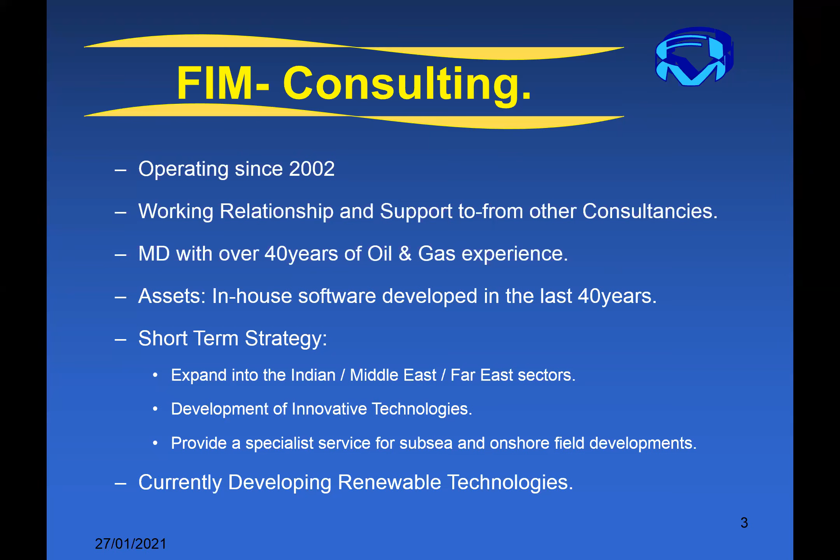With our expertise and software resources, we can very quickly identify fields for evaluation and acquisition for large organizations, as well as banking or financial institutions.

We undertake screening studies to provide optimum strategies for the field we want to develop or operate, through integrating reservoir, well, pipeline, and host facilities, and evaluate alternative reservoir depletion options, well production enhancement, multi-phase and transient operation analysis, and a range of feasibility studies to assist in the development or exploitation of the field.

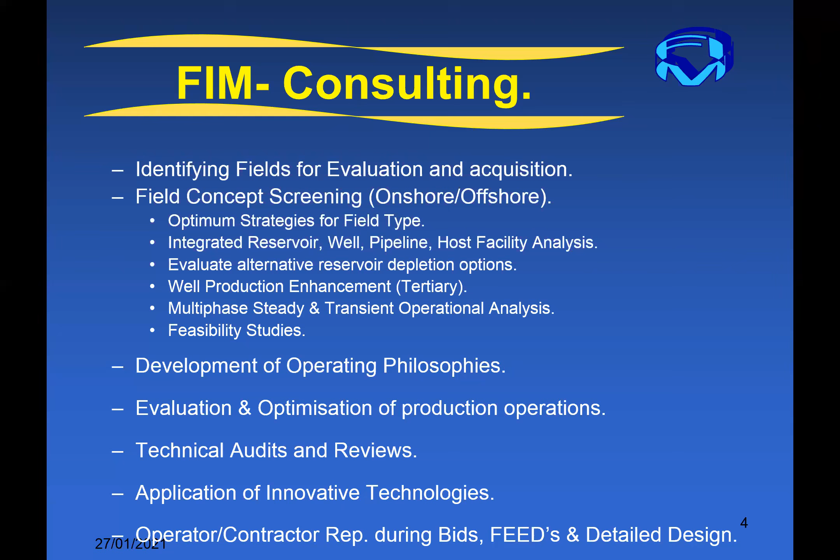As part of detailed design, we develop operating philosophies, evaluate and optimize production operations to make them as simple as possible, conduct technical audits and reviews, and apply innovative technologies where possible. Obviously, project managers don't like new technologies unless they've been tried and tested. We also represent operators and contractors during the whole range of studies, from initial bids, front-end engineering designs, to detailed design.

This is one of our software field options. We can model everything you see here, from the reservoir, the seabed, production wells, Christmas trees, connection systems, the jumpers between the tree and the manifold, flow lines, the insulation on the flow lines, and risers.

The reason for this is to answer a number of questions. For the field you want to develop or have developed, what's the best technology? Is it gas lift or natural flow? Do you need a downhole ESP pump or a multi-phase pump on the seabed, or do you need to separate on the seabed and transport the fluid separately? What are the flow assurance risks? What's the best reservoir recovery option to maximize oil from the reservoir and enhance production through the production well? And, the thing that makes the world go round, what's the lowest cost option?

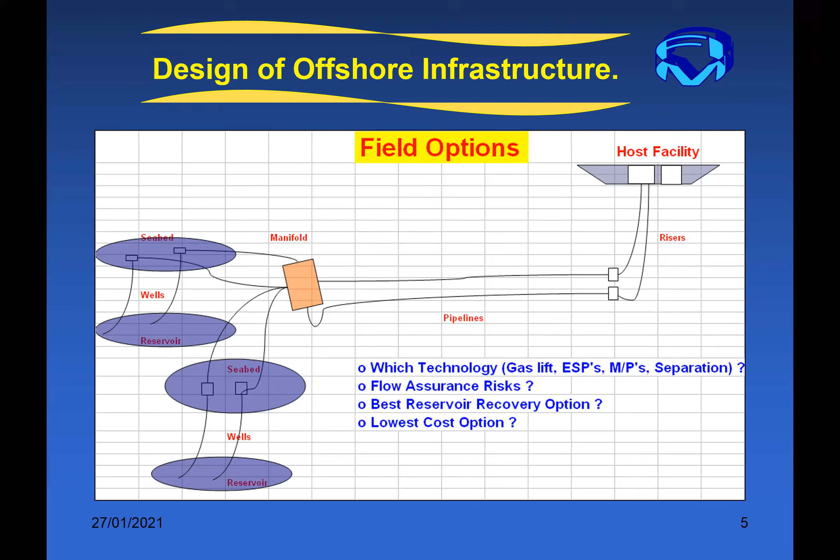These are things that can be answered by our Python software. In terms of flow assurance, we can split this into three areas: what causes blockages in the flow path, what about the integrity of each of the systems you're going to design and develop, and what are the operational issues?

From blockages: scales from water composition may precipitate various elements such as barium and strontium; for oil and gas, paraffins, wax, and asphaltenes based on the characteristics of the oil; gas hydrates, meaning if you mix light hydrocarbon gases with water you get hydrates like ice; emulsions, a mixture of oil and water; and sometimes foaming across high pressure drop chokes and valves in the system.

With respect to integrity, the main areas are corrosion, typically from CO2 in the light hydrocarbon content and water; production of sand, which erodes the metal, especially as sand passes at high velocity through bends or other equipment like valves; and flow-induced vibrations or resonance that may be caused due to production.

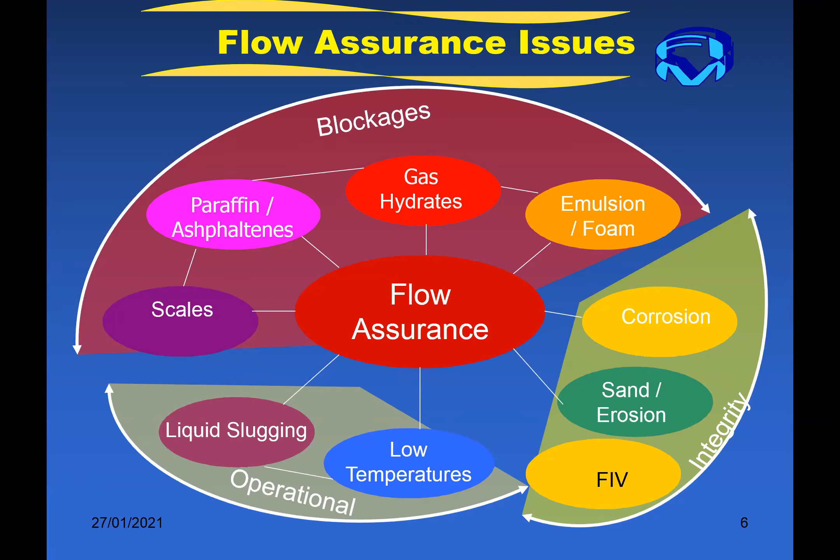In simplistic terms, these are the sort of parameters you need to understand in assessing flow assurance: what the reservoir pressure and temperature is, well depth, water depth, and the distance you want to transport to a host facility. It may well be onshore.

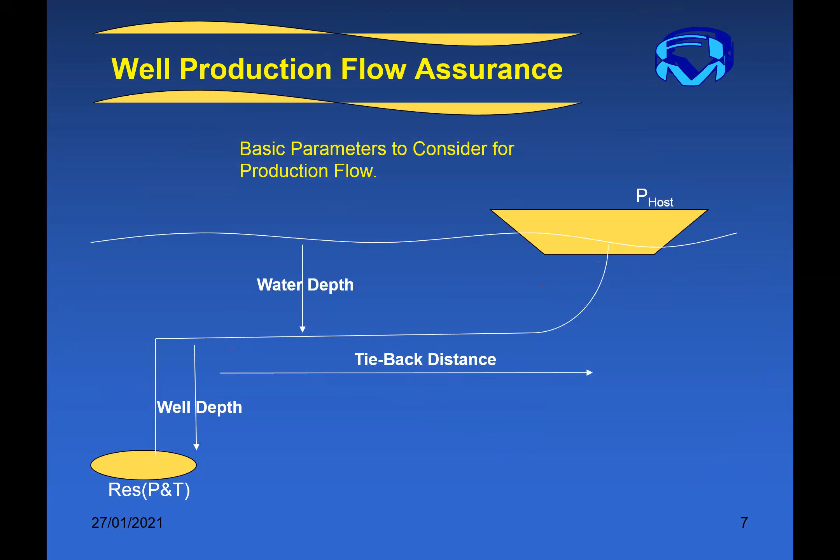So the question is, nobody in the world now likes the fact that we're producing hydrocarbons because they're so polluting. We've got to find a solution to the pollution aspect, especially CO2, in the oil and gas industry. But in the meantime, why do we need oil? Let me go through and explain why.

One of the highest consumers of energy is the US, and per capita it's about 11 kilowatts. If we take 5 kilowatts as the average for the world, and world population is 7 billion, we need something like 35 terawatts per day.

Now, if we were to replace this over a period of 25 years, look at what we would need in terms of different renewable energies. If it's nuclear, we need almost 4 nuclear plants built, 1 gigawatt per day. If it's wind, we would need 53 turbines of 3 megawatts each built every hour. If it's solar, we need to cover 255 square meters installed per second. If it's bio-based, we'd probably all starve because we don't have enough bioenergy.

However, we need to consider maybe all of these in addition to oil and gas during this transition phase. By the way, oil will be around for many, many years.

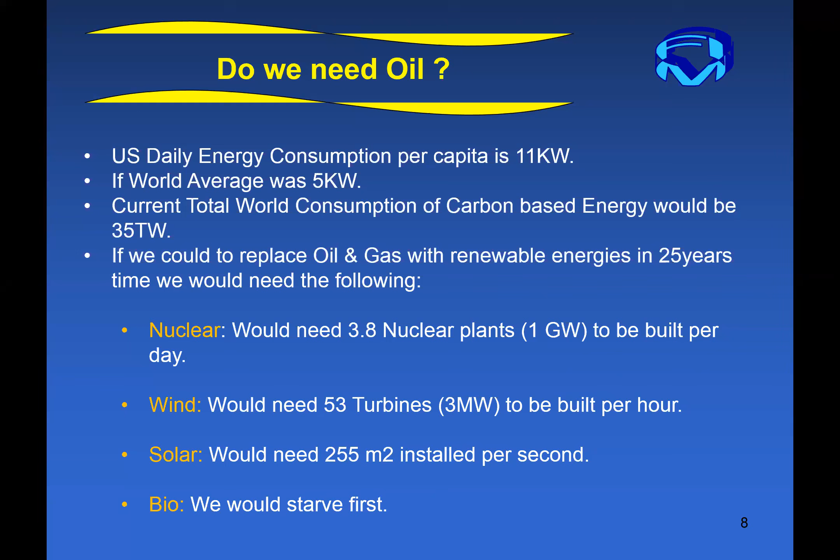So coming on to heavy oil, what is it? It's simple: it's high density and high viscosity.

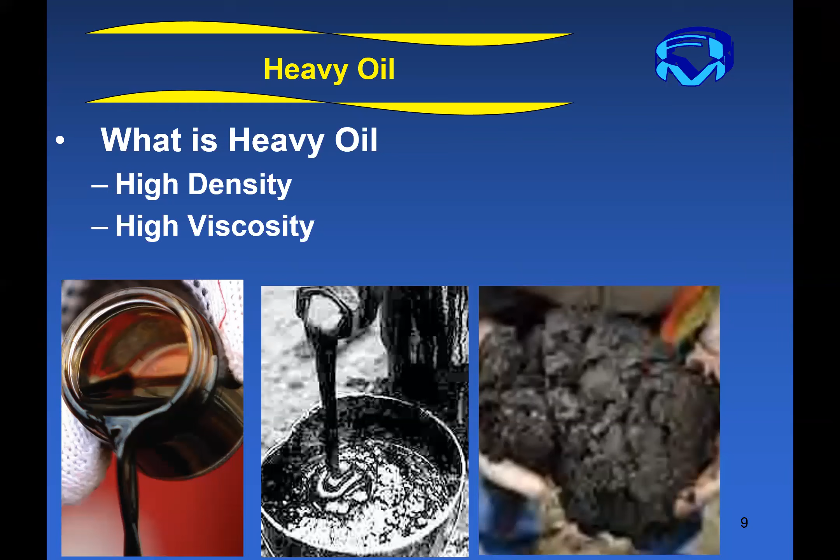Class B is extra heavy oil, where the API is much lower, 7 to 20, viscosity is high, 100 to 10,000, and also flows at reservoir conditions. Hopefully these are the ones we have offshore. Then Class C, the viscosity is much higher, and Class D, oil shale, is mining extraction.

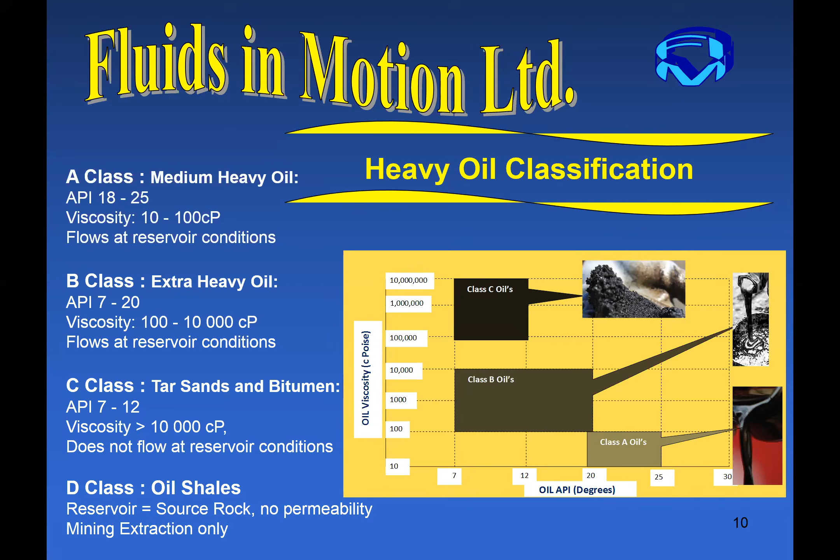And this is a classification provided by Total for some of the fields that have been developed over a number of years, and it's Class A and Class B offshore that have been considered for development or are producing at the moment.

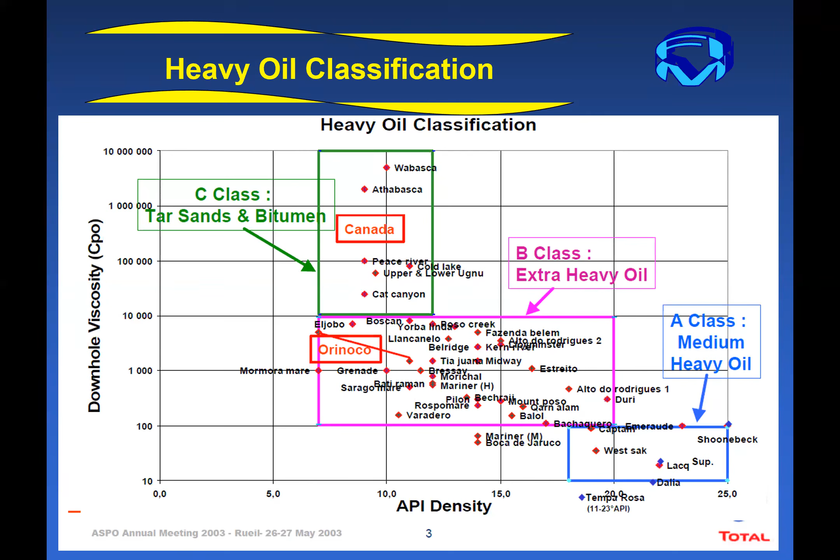Heavy oil reserves by region — this shows that the American continent, both north and south, has the lion's share of heavy oil, although it exists in other parts of the world.

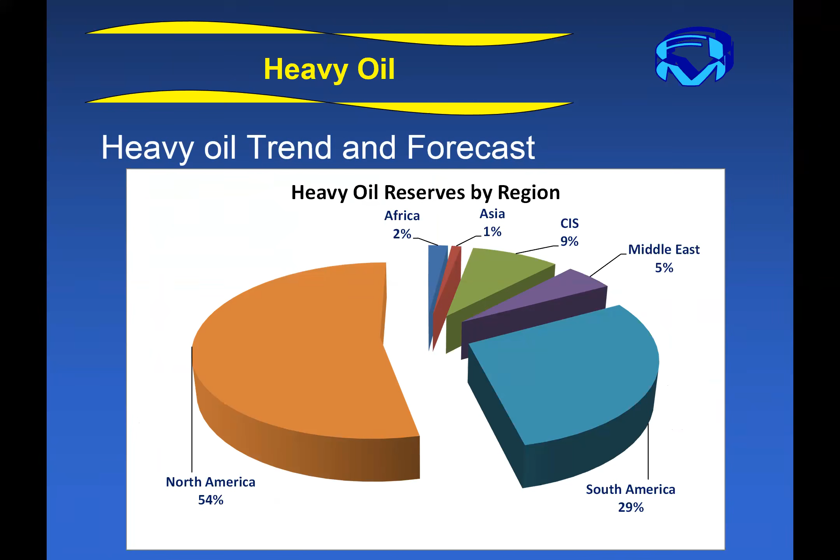And heavy oil reserves by type — you see, luckily for us, Class A and Class B are the lion's share, almost 50%. So that's good news.

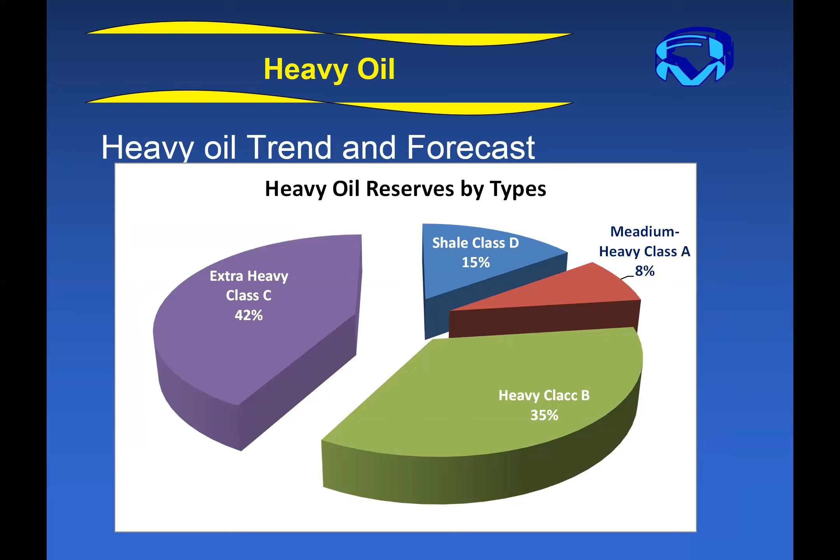World oil reserves by oil type. Now, we've been producing conventional oil, which is only about 30% of the total oil available. Extra heavy oil and heavy oil is almost 20 to 40% is heavy oil. So there's a lot of energy out there, but we have to make it environmentally viable.

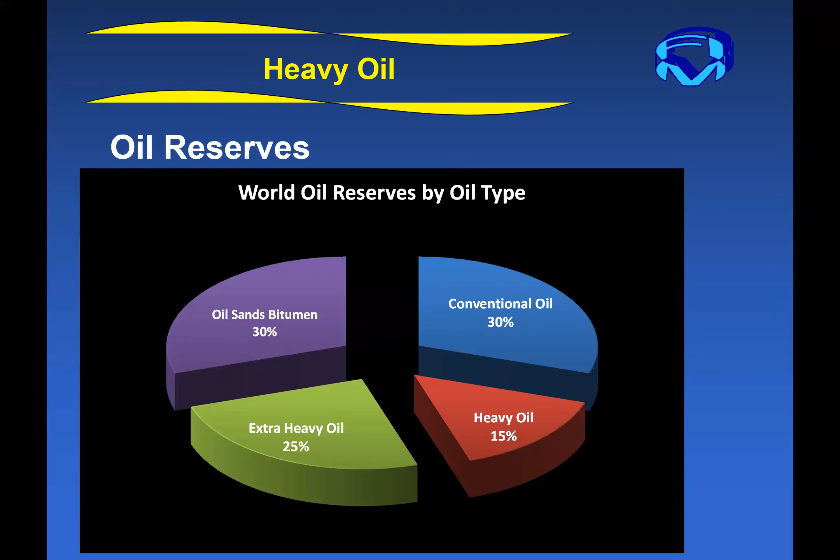So heavy crude oils — about 10% have been produced at the moment approximately, maybe a bit more or less now.

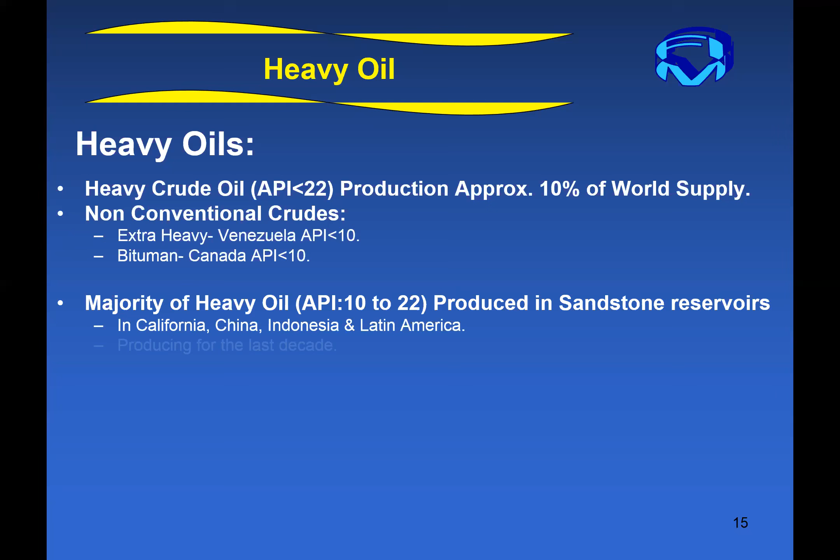Non-conventional crude, extra heavy oil — examples are from Venezuela, API less than 10, bitumen in Canada, less than 10 API. Majority of heavy oil between 10 to 22 API is produced in sandstone reservoirs in California, China, Indonesia, Latin America, and they've been producing for the last 10 to 15 years, or maybe some even longer.

Generally, cold production and steam enhanced recovery are some of the techniques used. Huge discoveries in carbonate reservoirs — the formation of carbonate reservoirs is fairly complex with respect to varying permeability and porosity in the same formation, so it makes the simulations more difficult.

There are many naturally fractured reservoirs, which is good news. Only a few carbonates have been produced at the moment. Pilot steam injection projects in Kuwait, Saudi, and Oman — maybe some of these are now beginning to be produced.

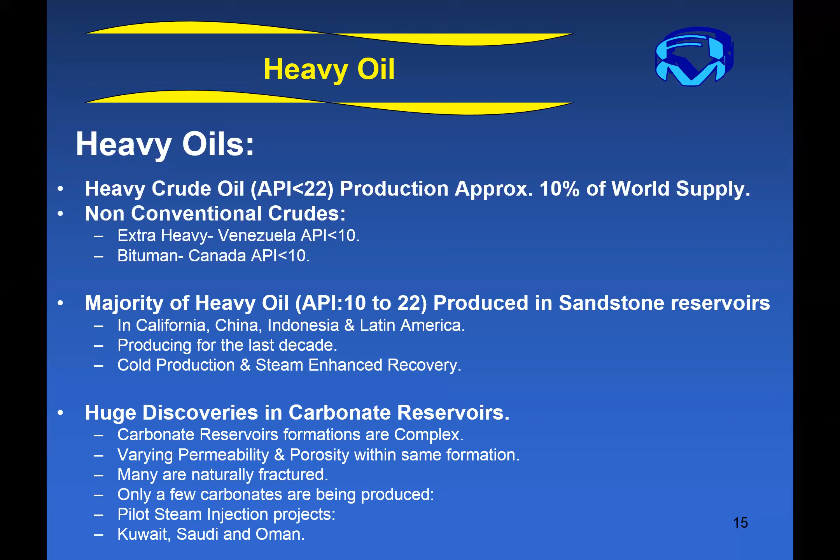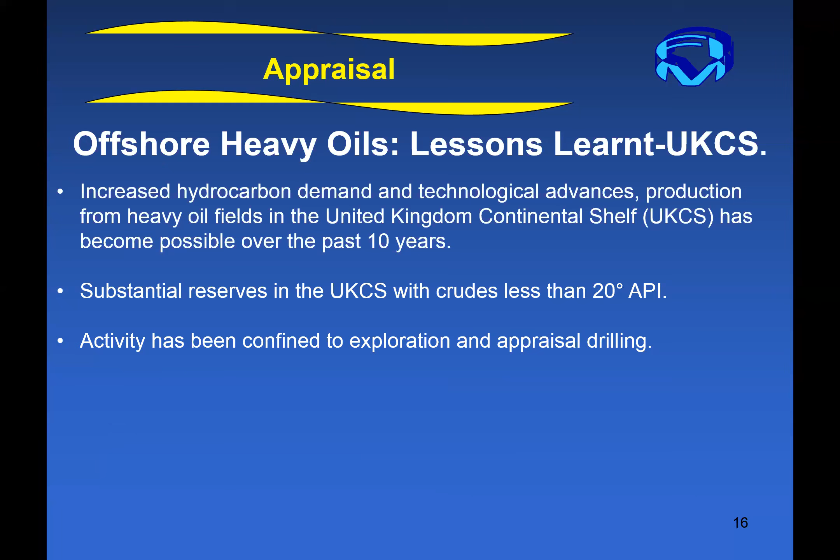Lessons learned, certainly in the UK continental shelf sector, is as follows. Because demand is increasing and world population is also increasing, there's a requirement to now consider heavy oil fields, and this has become possible in the last 10 to 15 years. There are substantial reserves with crude less than 20 degrees API in the UK continental shelf sector. Activity 10 years ago was confined to exploration and appraisal drilling.

Main reasons are high uncertainty of the reservoir and fluid properties. If you don't get these correct, then you're designing the system downstream incorrectly. So as soon as you can get fluid properties out of the reservoir, you can start serious simulation and design work. There are also operational complexities inherent in heavy oil.

This limits the use of conventional appraisal well testing technology. Here in the UK, a method was developed to determine the most suitable technology for testing wells with heavy oil using electrical submersible pumps, or ESPs. On the Bentley field, a solution was tried about 10 years ago.

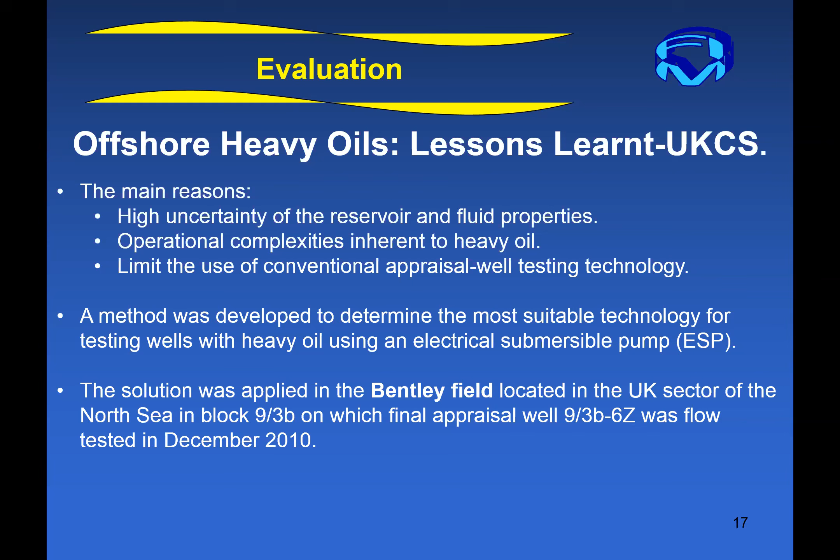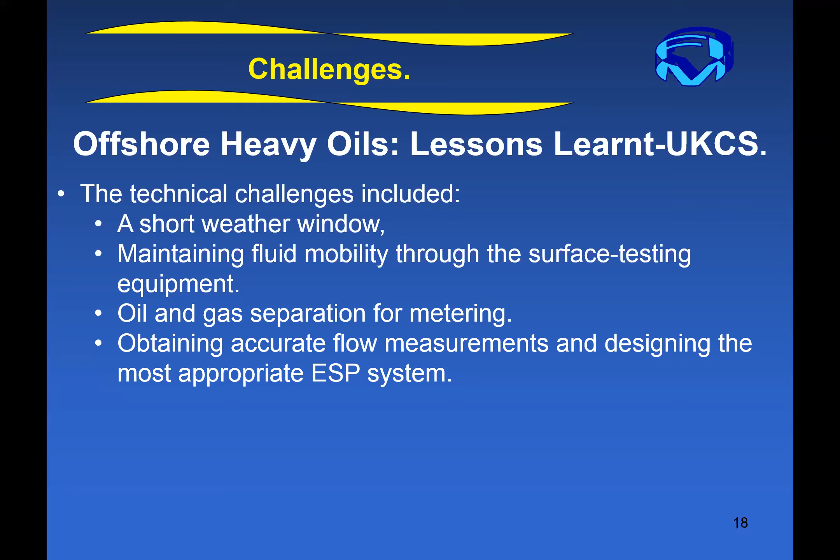Technical challenges include short weather windows for the assessment of heavy oils in the UK. Maintaining fluid mobility was an issue, especially for surface testing of oil and the associated equipment required, separating the oil for metering purposes, maintaining accurate measurements, and designing the most appropriate ESP systems.

So there are a number of different technology options to produce oil. Ideally, you want to produce it straight from the reservoir via natural flow, cold and natural temperature and pressure flow. That's not always possible. In fact, in most cases it won't be possible.

So some systems are designed called CHOPS, cold heavy oil production systems, or you may go for artificial lift with ESPs. And if none of these work, then you've got to provide other forms of energy, thermal heat, for example cyclic steam stimulation, steam-assisted gravity drainage, vapor extraction process, which involves injecting light ends to mix with the heavy crude oil to dilute it and make it lighter. And if you're very bold, you go for combustion in the reservoir itself, in-situ combustion and toe-to-heel air injection combustion.

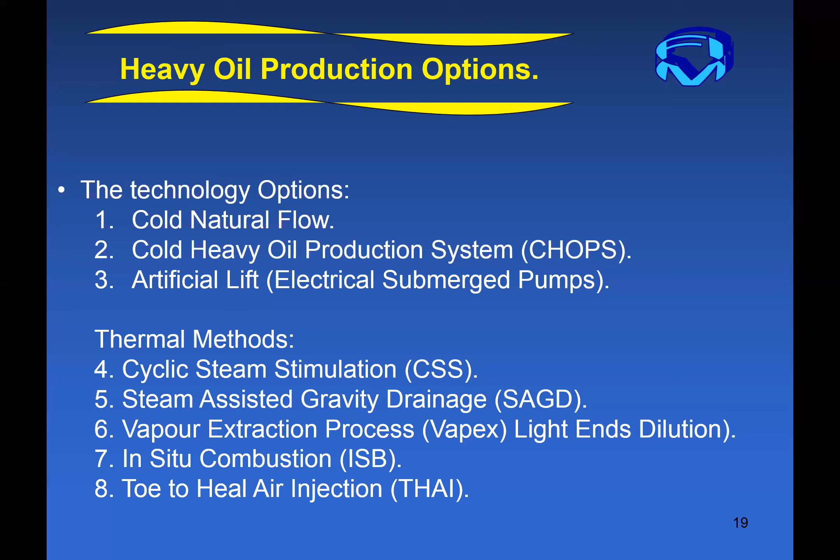This shows two cases, one in Athabasca in Canada and the other Orinoco in Venezuela. In Canada, the viscosities are enormously high, where thermal production was the only way to actually reduce it. Reservoir temperature was very low, 10 degrees C. In Venezuela, reservoir temperature was relatively high, 53 degrees C, and viscosity was a little high but nothing to worry about. In Canada, it's just bitumen, I'm sure.

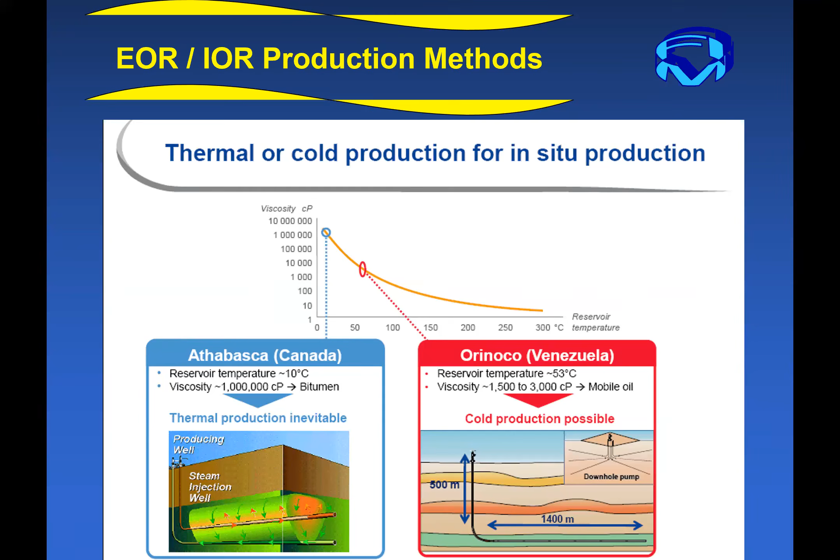The other method, in-situ heat or fire flood, involves igniting the oil, burning it in the reservoir, and that moves the oil closer to the production well you want to extract the oil from. But there are high levels of risk and high cost associated with these options, especially if they don't succeed.

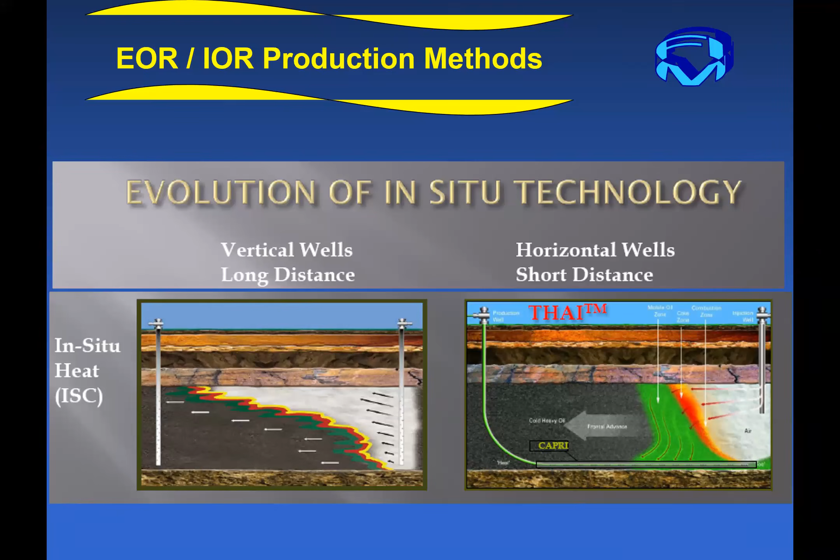VAPEX is another option where you inject solvents in the top well, and this mixes with the oil, and the bottom well begins to pick up the lighter oil that is then produced.

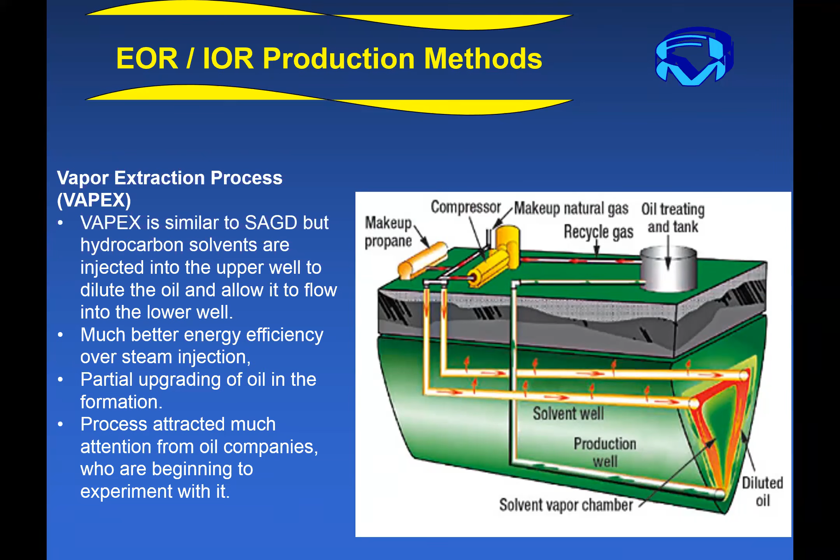So some hard facts - let me go through challenges and opportunities. Technology is the key to meeting energy demand as well as emissions management and producing oil and gas. So government and industry need to get together and respond through regulations, policies, investment in new technologies, and provide incentives to developers of new technologies.

CO2 has to be the solution. We need to come up with CO2 solutions if we want to keep the oil industry producing. Otherwise, we're killing ourselves.

Energy efficiency is also another big step towards minimizing or optimizing the use of oil and gas. There are trading schemes in which the polluter pays, but it doesn't help overall - if you have the finance, you can produce and pay for your pollution. So long-term, cyclically, it helps, but in the short-term, it doesn't help.

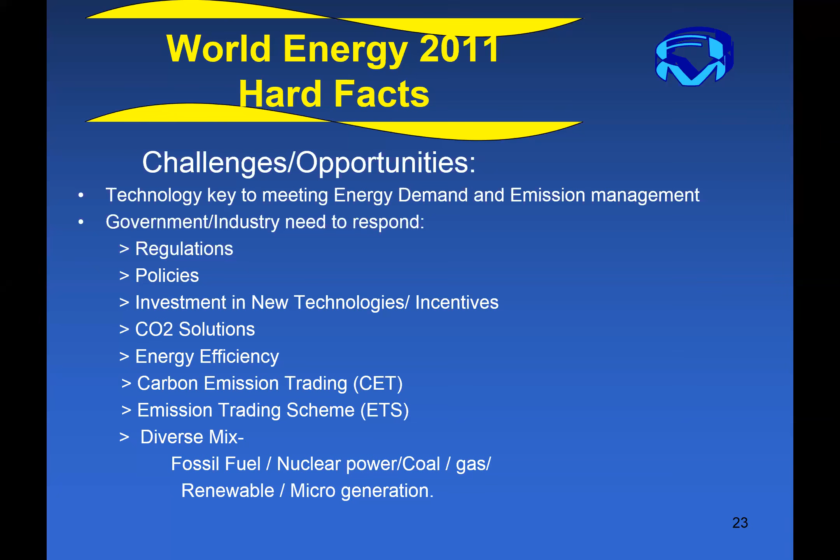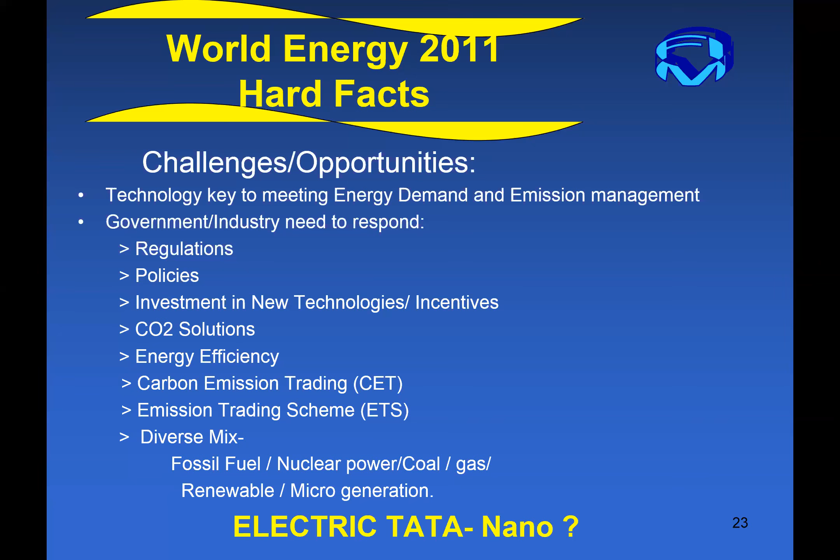We need to move towards a transition where we go from fossil fuels to renewables, as well as micro generation to renewable energies. A few years ago, Tata came up with a car called Nano, one of the cheapest cars in the world, to help reduce accidents which occurred from people riding motorbikes with a large number of people on them. But the issue with that car was that if you were seen driving it, people thought, oh, this is a poor man, so it didn't go that well in terms of sales. If you can make that electric, that's one solution to minimizing CO2.

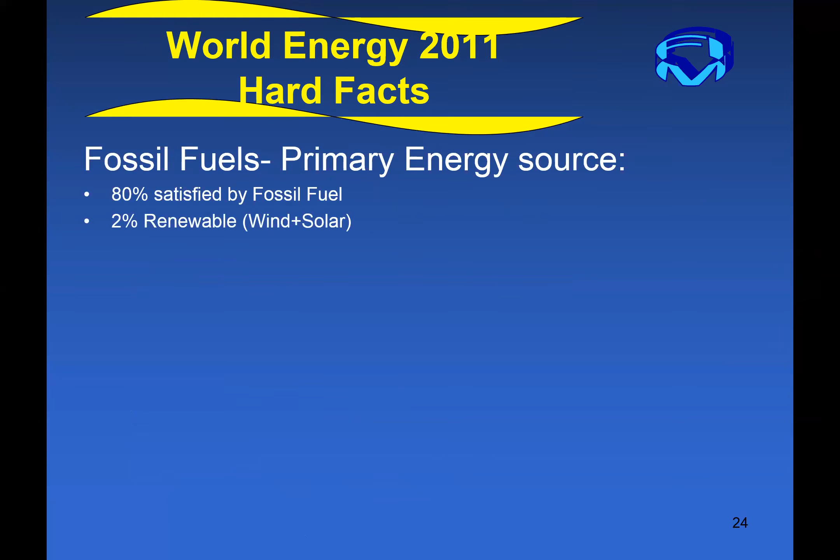At the moment, fossil fuels are still the primary source of energy, with over 80% satisfied by that, and 2% by wind and solar, though I think that's increased quite substantially now. We require 20% by year 2020, 30% after that.

The decline of easy oil has appeared, while demand is still increasing. 22 trillion barrels of oil are still in place according to IEA, with 5 to 10 trillion barrels recoverable using existing technologies. Difficult oil in Arctic and deep waters is energy intensive, difficult to produce, and high cost to develop.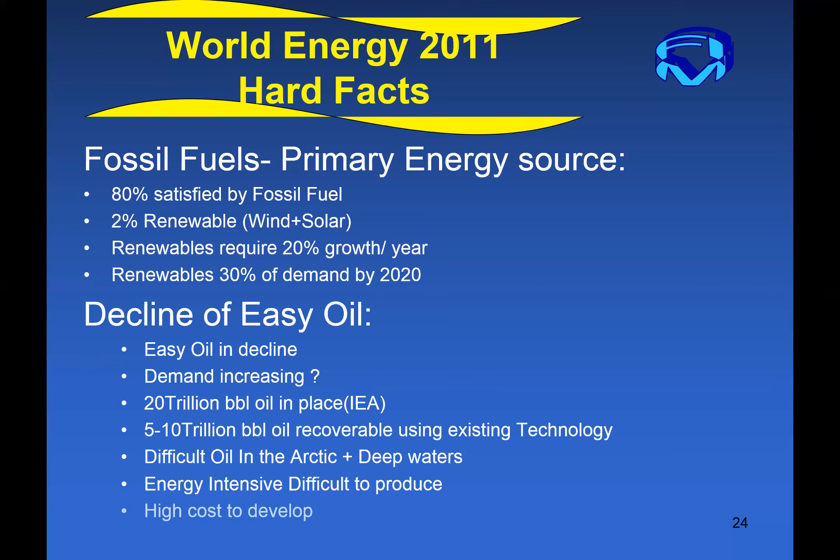The global energy demand is rising, with population increasing to 9 billion by 2050 or maybe more. This means high demand for energy, currently from fossil fuels, so we're going to throw more CO2 emissions into the environment.

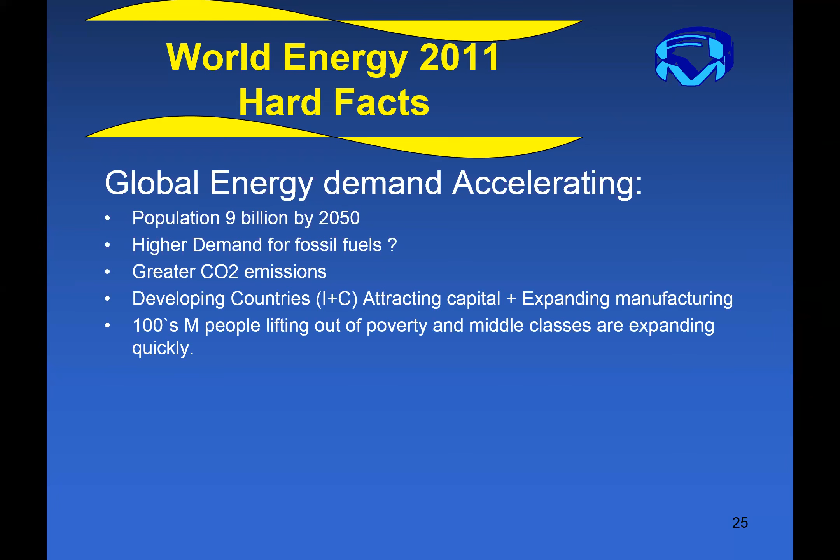Developing countries like India and China are attracting capital from the world and expanding their manufacturing. Hundreds of millions of people are moving out of poverty, and middle classes are expanding quickly. What do they want? Cars, mobiles, TVs, flying around the world, meaning more pollution, and increased consumption of fuel plus electricity.

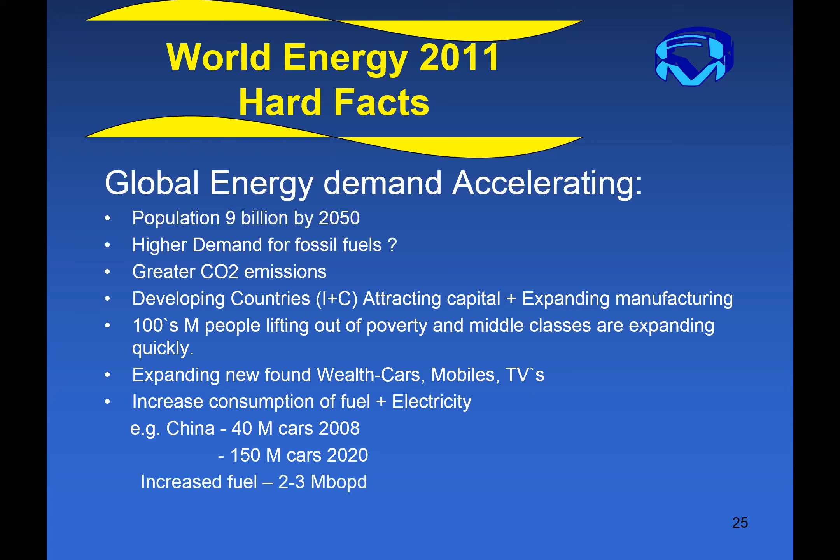For example, China had 40 million cars in 2008, and it's in the region of 150 million or possibly more now. Based on that, we will have to increase production by 2 to 3 million barrels of oil per day, which is significant. This leads to rising CO2 levels and the greenhouse effect.

Increased gas emissions from fossil fuels, increased use of coal by India, China, US, and EU. CO2 emissions from coal are twice that of fossil fuels, so that's the first fuel we need to get rid of if possible. Coal gasification and carbon capture and storage is one way of solving that problem, and CO2 is definitely unacceptable at the moment.

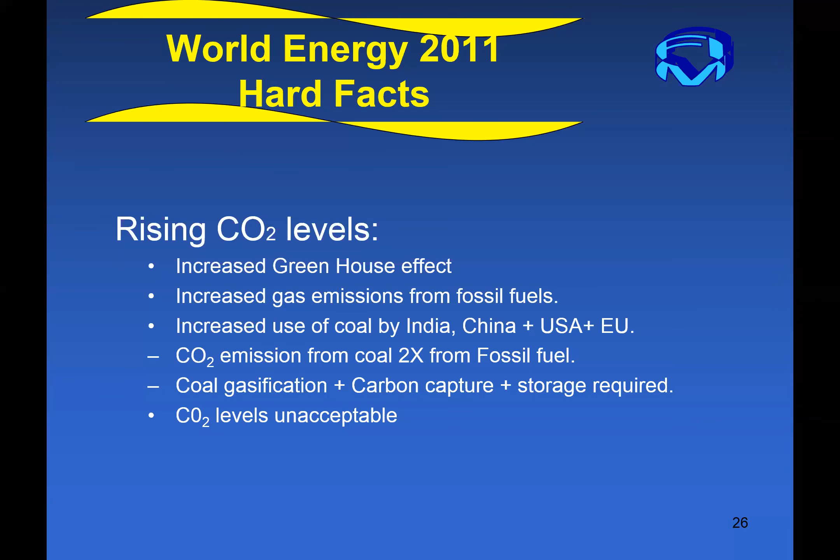So what do we offer in terms of training? We offer flow assurance for offshore production, designing for transient operations of oil, gas, and water pipelines, flow assurance for heavy oil production, renewable energy selection and design, and environmental pollution aspects.

We have quite a few patents that we put together for oil and gas and renewable energy. I can certainly say that innovation has no hierarchy. Anybody can invent. The question is who can make it economic - that's the issue.

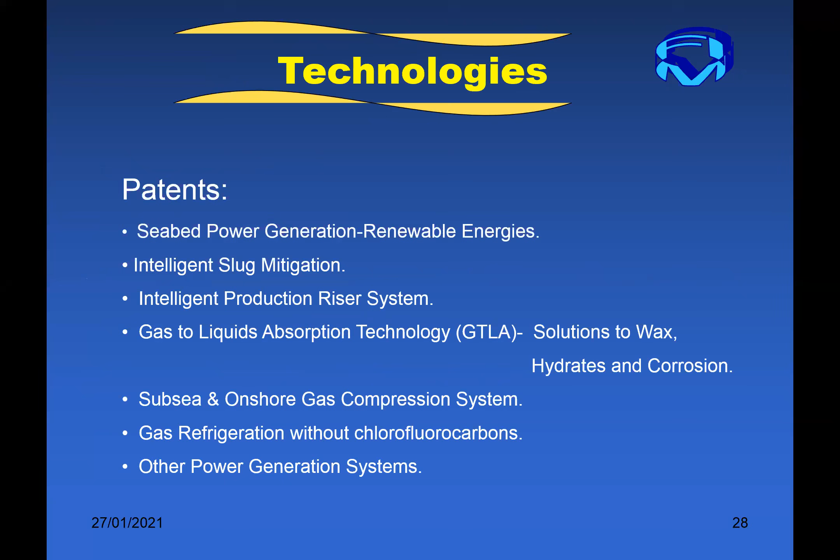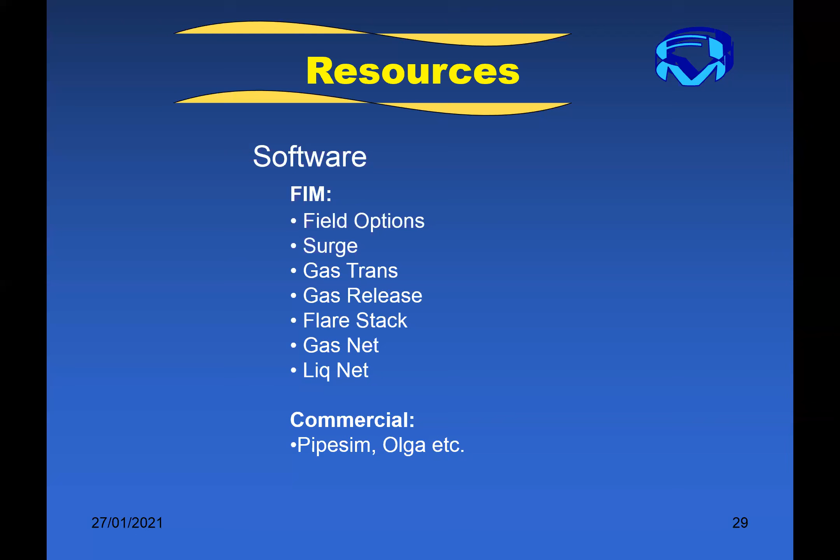In-house software, we mentioned field options - there's a whole range of other software from surge analysis, transients in gas and liquid lines, as well as gas release in environmental aspects and flare stack, commercial packages like Pipesim, Olga and so on, plus a few other surge analysis in-house packages we have.

Some experience we've had on heavy oil: we're involved in the early stages of Rona West of Shetland, Mangala Rajasthan, which is very difficult oil to produce - I'll go through that in more detail in a moment - and Kashagan flow assurance, whereby artificial islands had to be developed.

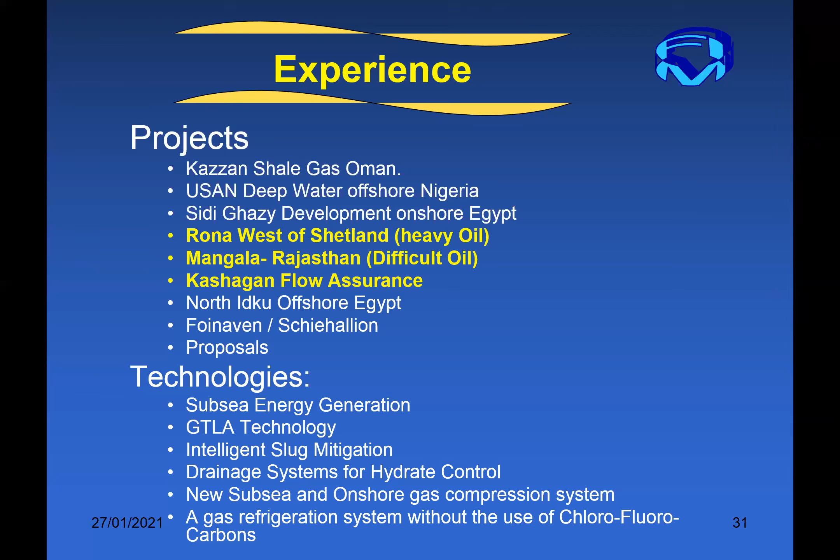Rona West had 13 API gravity. Porosity was very good at 25%, and permeability was excellent as well. So that was good news for this particular heavy oil.

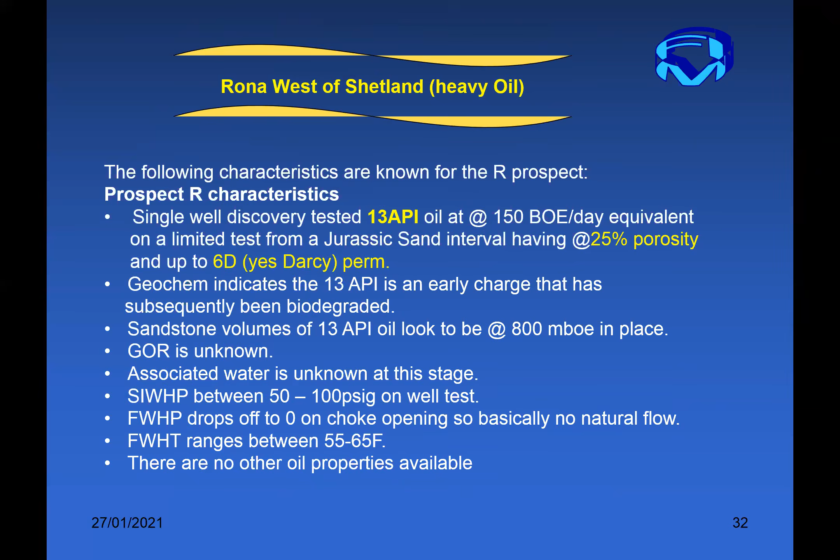For Mangala, the reservoir temperature was 65 degrees C. The cloud point, where wax begins to appear from the oil, was 2 degrees lower than the reservoir temperature. The pour point means if the temperature drops below 40 degrees C, you don't get flow. In addition, you've got very high wax content, so mobility was unfavorable.

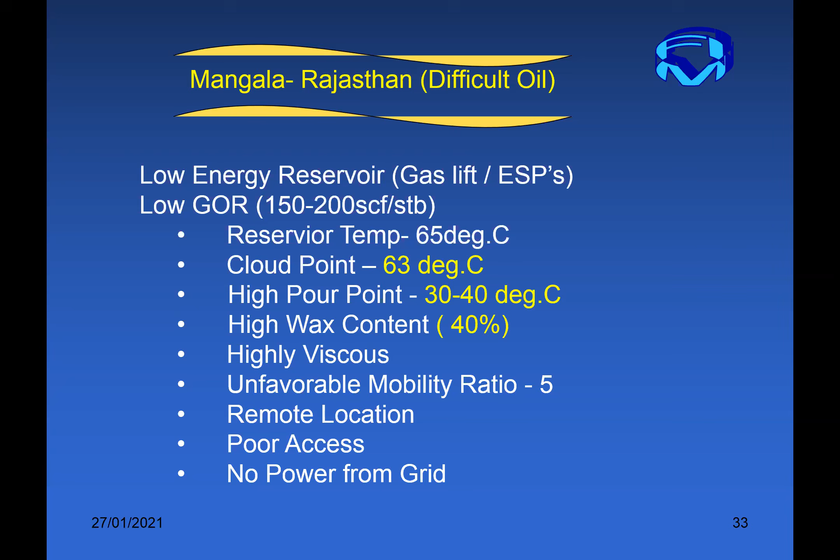This is the configuration that was considered by Cairn Energy at that particular point in time. The transport of this oil will be 200, 400, or 600 kilometers to various refineries in India.

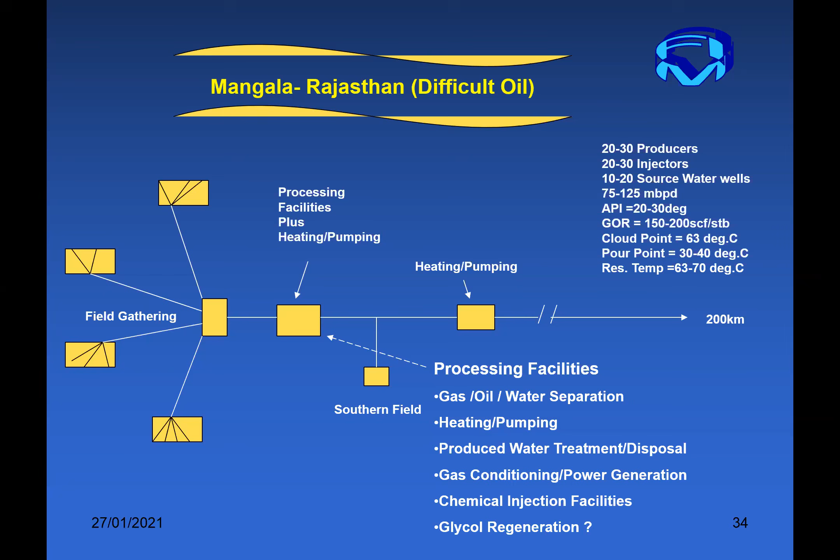For Kashagan, there's 20% H2S, so corrosion was a main issue. These yellow boxes are artificial islands that have been created, where the depth of the water was only about 4 or 5 meters.

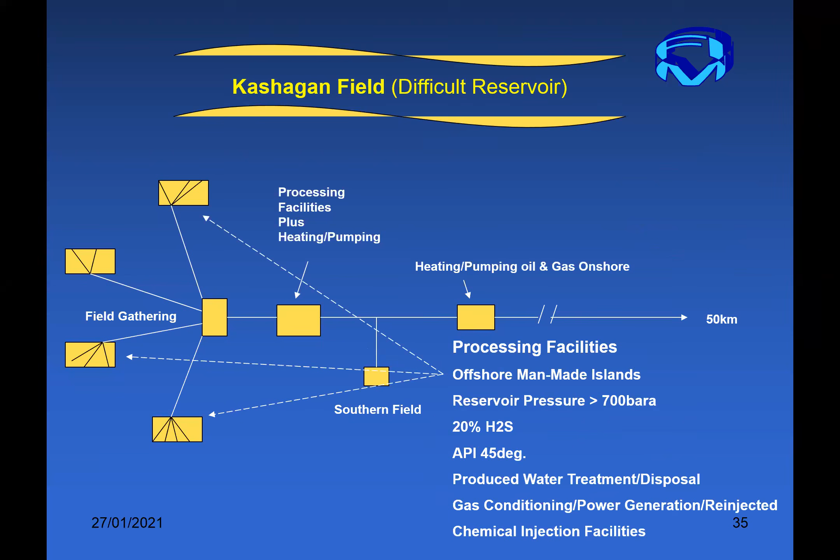Renewable energies - we're certainly moving towards renewable energies. We can evaluate renewable energy type and applications to oil and gas. We need to consider as much as possible how we can use renewable energies to assist oil and gas operations: predicting power generation, selection of the process for renewable energy, design, costing, and various operational issues. We can provide independent advice.

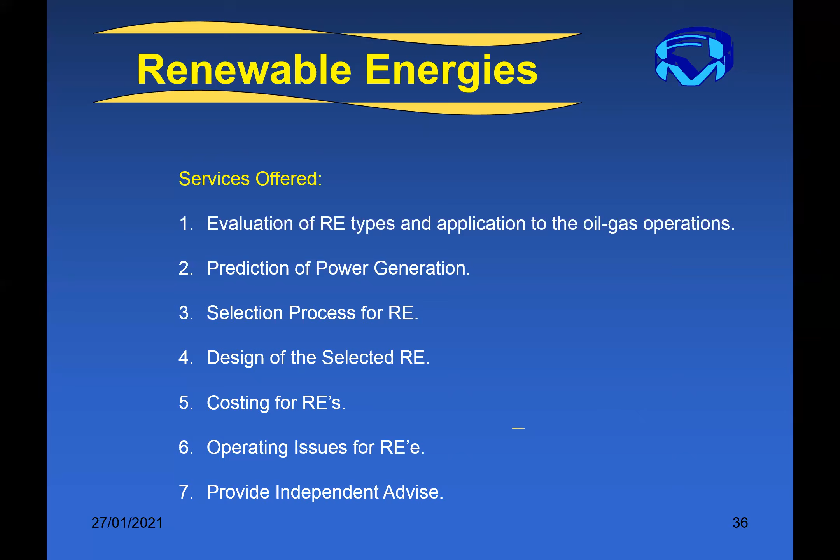We have 4 books that go with the training: Flow Assurance for Oil, Gas, Field Production Transport; Subsea Oil, Gas, Field Technology Selection via Flow Assurance Evaluation; Designing for Transient Operations of Oil, Gas, and Water Pipelines; and Renewable Energies, Nature's Gift.

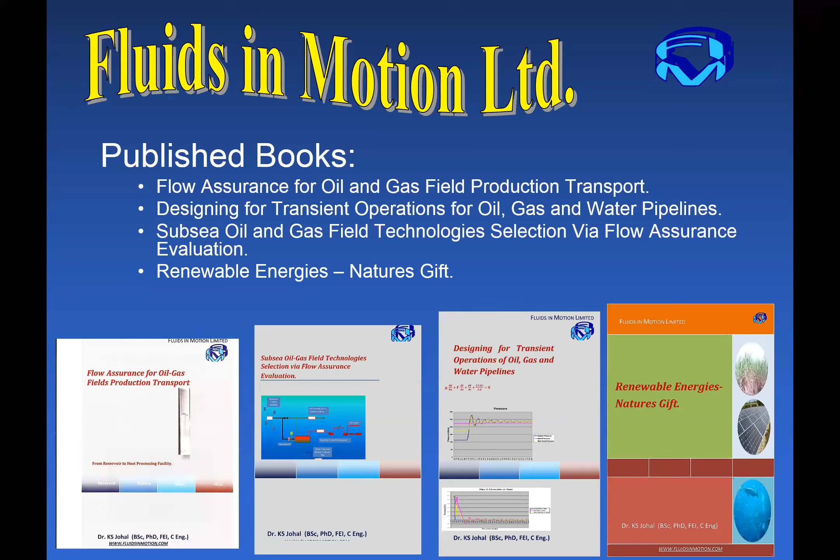Coming back to heavy oil, early evaluation - the questions we need to ask: is there sufficient field data available? Then you need to consider modeling the integrated system from the reservoir all the way to the processing facility, and evaluate technologies for application in heavy oil - in other words, which technology can you use for this particular oil type?

Consider the current design operating constraints that we have for the field. Establish potential to increase production through revised operating procedures. Assess the potential to retrofit new technology. There may be a few out there that we started to produce, and since then there's been new technology. Can you retrofit that technology to make it economically viable?

And then the critical element is flow assurance. You need to assess and then mitigate with ready-made mitigation options for the flow assurance system. Establish the economic benefits and the risks for each alternative. And this is where software like field options comes into play.

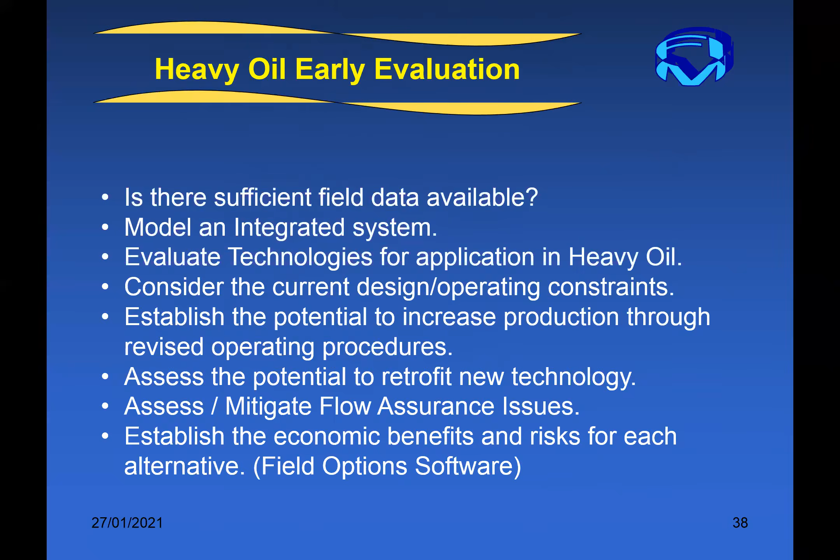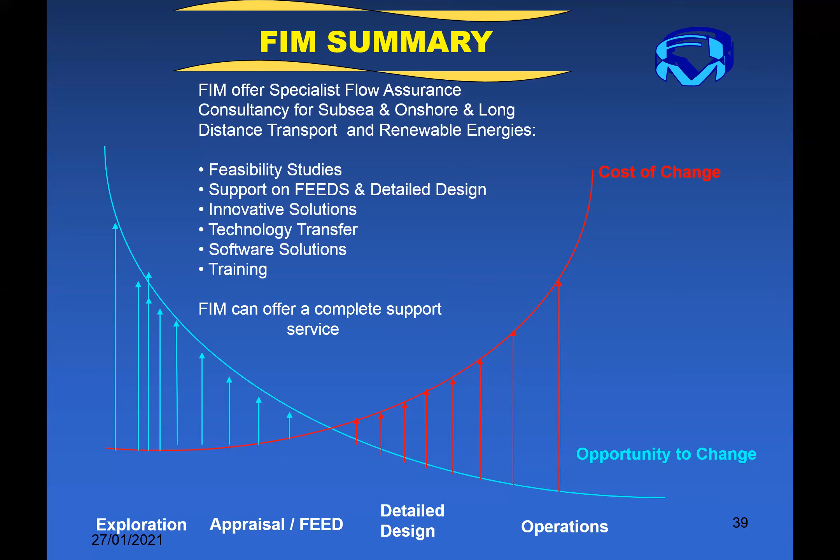Thank you, sir. Now we'll go for the Q&A session. Okay. So will you take the questions or should I? Yes, I'll take the question. Thank you.

So should I read the questions for you? Sorry, I didn't hear the question. Okay.

First question: what AI and machine learning tools could be used to forecast and monitor flow assurance problems in surface petroleum production facilities? Can you repeat that question? What artificial intelligence and machine learning tools could be used to forecast and monitor flow assurance problems in surface petroleum production facilities?

Okay, so the question relates to existing fields that are operating, I suspect. Yes, that type of tool could well be useful as a data mining approach. In other words, if you have plenty of data and the field has been operating for a few years, then you can apply data mining techniques and probability analysis to assist in flow assurance. However, before you get to that stage, there are lots of tools available that can assess and identify which flow assurance issues you're going to have to overcome.